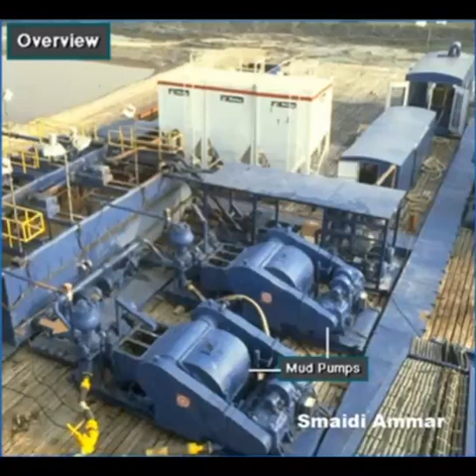Pick up mud from the suction tank and circulate the mud downhole, out the bit, and back to the surface.

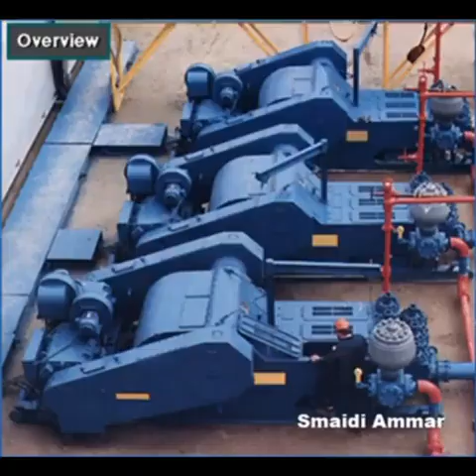Although rigs usually have 2 mud pumps, and sometimes 3 or 4, normally they use only one at a time. The others are mainly used as backup in case one fails. Sometimes, however, the rig crew may compound the pumps, that is, use 2, 3, or 4 pumps at the same time to move large volumes of mud when required.

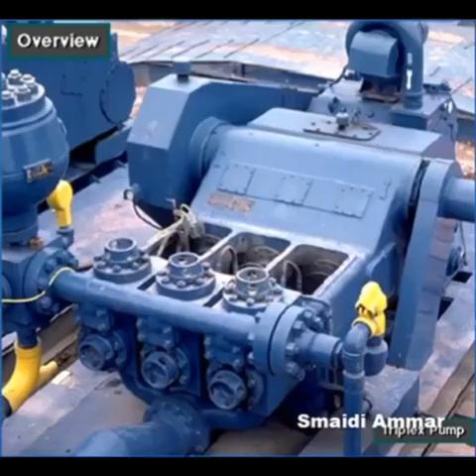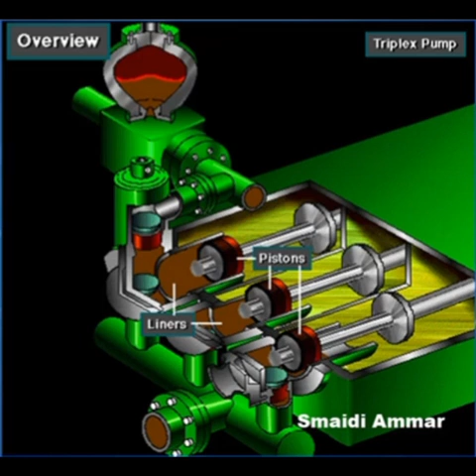Rigs use one of 2 types of mud pumps: triplex pumps or duplex pumps. Triplex pumps have 3 pistons that move back and forth in liners. Duplex pumps have 2 pistons that move back and forth in liners.

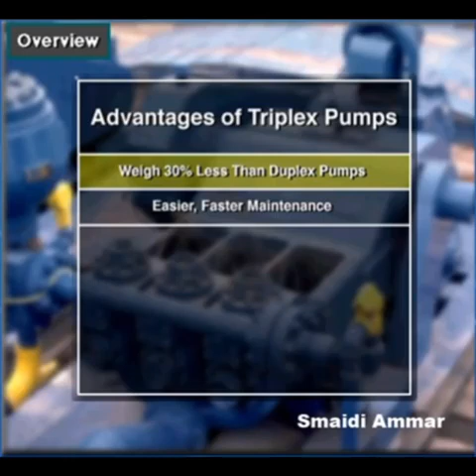Triplexes have many advantages. They weigh 30% less than a duplex of equal horsepower, or kilowatts. The lighter weight parts are easier to handle, and therefore easier to maintain. The other advantages include: they cost less to operate, their fluid end is more accessible, and they discharge mud more smoothly. That is, a triplex's output doesn't surge as much as a duplex.

One of the most important advantages of triplex over duplex pumps is that they can move large volumes of mud at the higher pressures required for modern deep hole drilling. Triplex pumps are gradually phasing out duplex units.

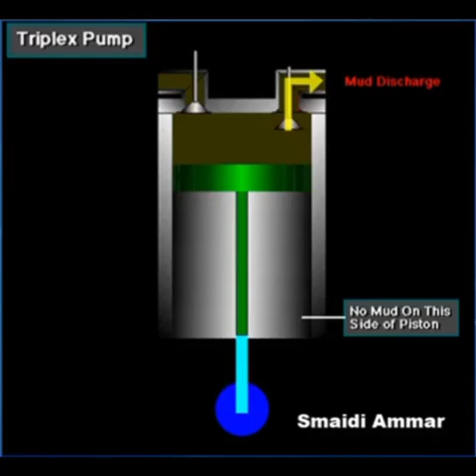In a triplex pump, the pistons discharge mud only when they move forward in the liner. Then, when they move back, they draw in mud on the same side of the piston. Because of this, they are also called single-acting.

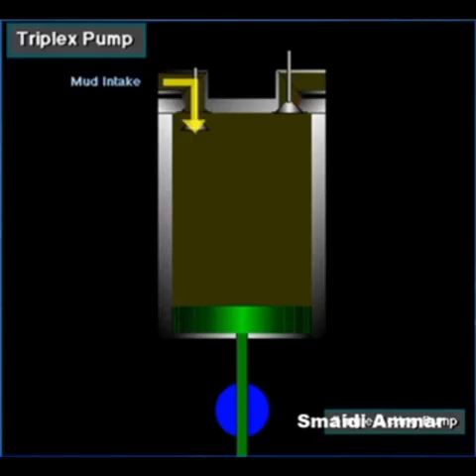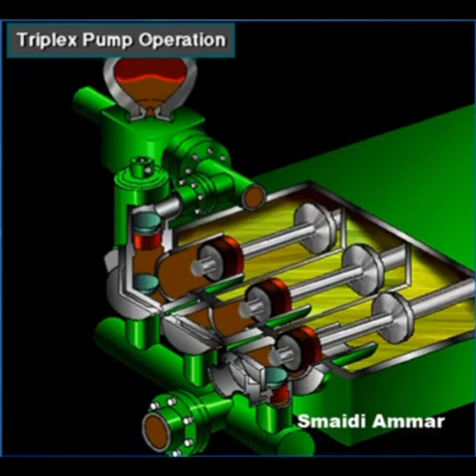Here's a schematic of a triplex pump. It has 3 pistons, each moving in its own liner. It also has 3 intake valves and 3 discharge valves, and a pulsation dampener in the discharge line.

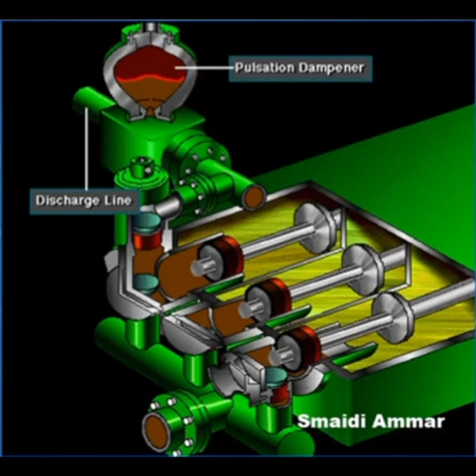Look at the piston at left. It has just completed pushing mud out of the liner and through the open discharge valve. The piston is at its maximum point of forward travel. The other 2 pistons are at other positions in their travel, also pumping mud. But right now, concentrate on the left one to understand how the pump works.

The left piston has completed its backstroke, drawing in mud through the open intake valve. As the piston moved back, it lifted the intake valve off its seat and drew mud in. A strong spring holds the discharge valve closed.

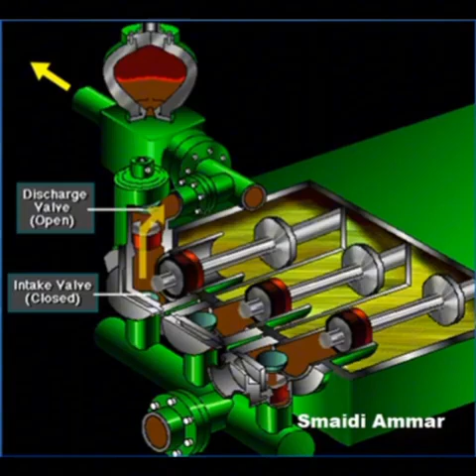The left piston has moved forward, pushing mud out through the now open discharge valve. A strong spring holds the intake valve closed. The left piston has completed its forward stroke, the full length of the liner, completely discharging the mud from it.

All three pistons work together to keep a continuous flow of mud coming into and out of the pump.

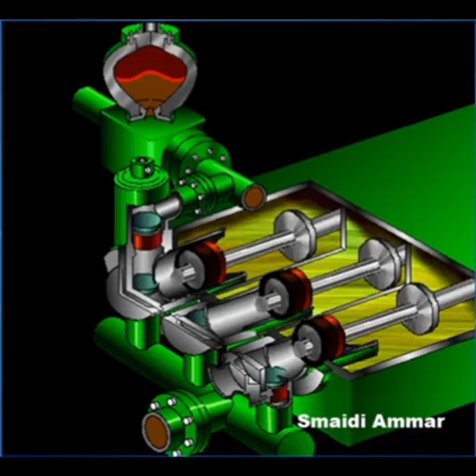Crew members can change the liners and pistons. Not only can they replace worn-out ones, but they can also install different sizes. Generally, they use large liners and pistons when the pump needs to move large volumes of mud at relatively low pressure. They use small liners and pistons when the pump needs to move smaller volumes of mud at relatively high pressure.

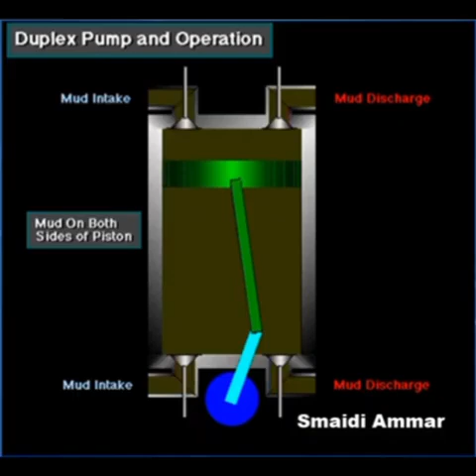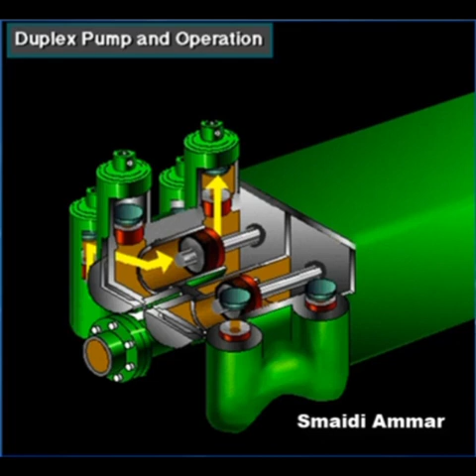In a duplex pump, the pistons discharge mud on one side of the piston and, at the same time, take in mud on the other side. Notice the top piston and liner. As the piston moves forward, it discharges mud on one side as it draws in mud on the other. Then, as it moves back, it discharges mud on the opposite side and draws in mud on the side where it had earlier discharged it.

Duplex pumps are therefore double-acting.

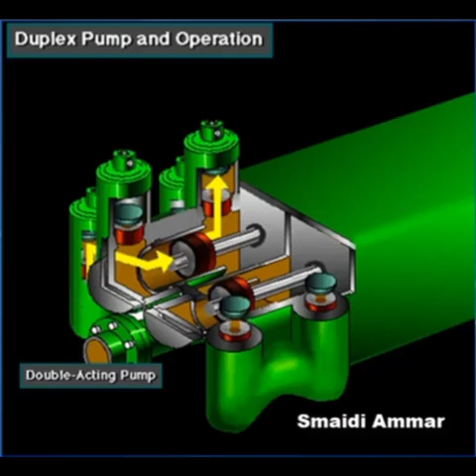Double-acting pumps move more mud on a single stroke than a triplex. However, because they are double-acting, they have a seal around the piston rod. The seal keeps them from moving as fast as a triplex.

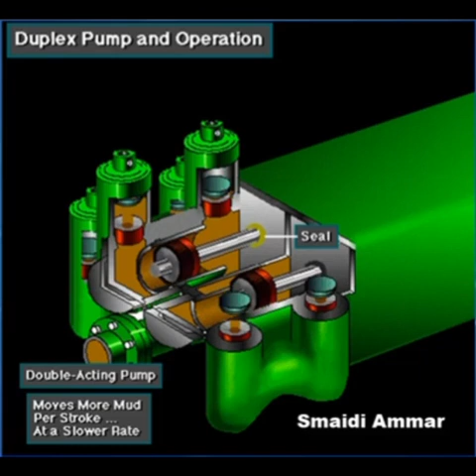Input horsepower ranges from 190 to 1,790, or from 142 to 1,335 kilowatts. The largest pump's maximum rated working pressure is about 5,000 psi, almost 35,000 kilopascals, with 6-inch, 152 millimeter liners.

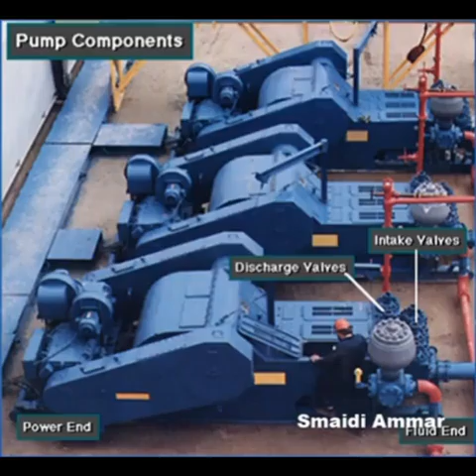A mud pump has a fluid end, power end, and intake and discharge valves. The fluid end of the pump contains the pistons with liners, which take in and discharge the fluid, or mud. The pump pistons draw in mud through the intake valves and push mud out through the discharge valves.

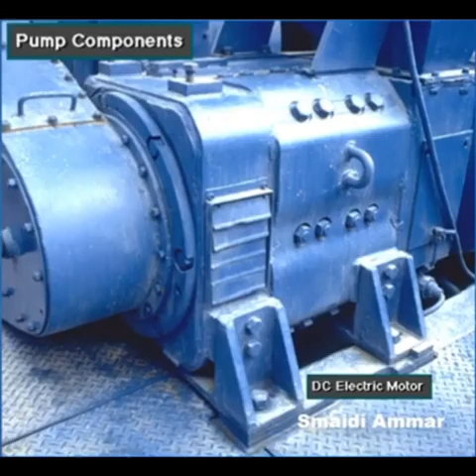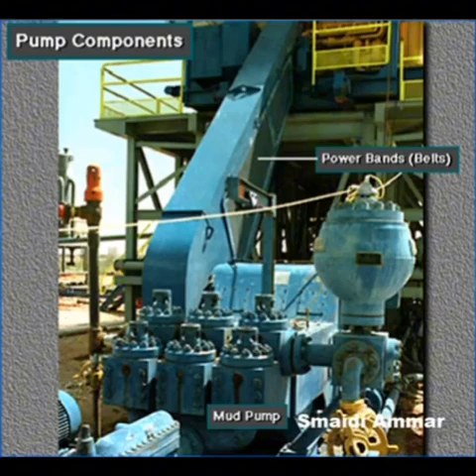The power end houses the large crankshaft and gear assembly that moves the piston assemblies in the fluid end. Pumps are powered by a pump motor. Large modern diesel-electric rigs use powerful electric motors to drive the pump. Mechanical rigs use chain drives or power bands, belts, from the rig's engines and compound to drive the pump.

A pulsation dampener connected to the mud discharge line smooths out surges created by the pistons as they discharge mud. This is a standard bladder-type dampener.

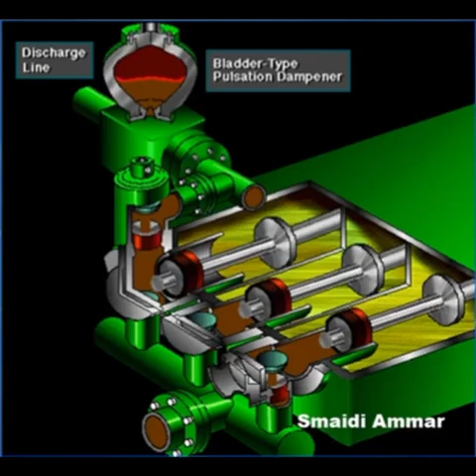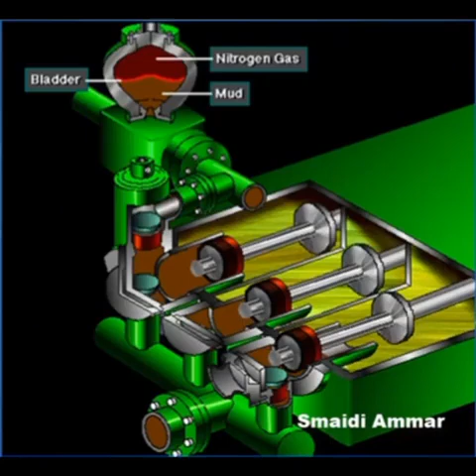The bladder in the dampener body separates pressurized nitrogen gas above from mud below. The bladder is made from synthetic rubber and is flexible. When mud discharge pressure presses against the bottom of the bladder, nitrogen pressure above the bladder resists it. This resistance smooths out the surges of mud leaving the pump.

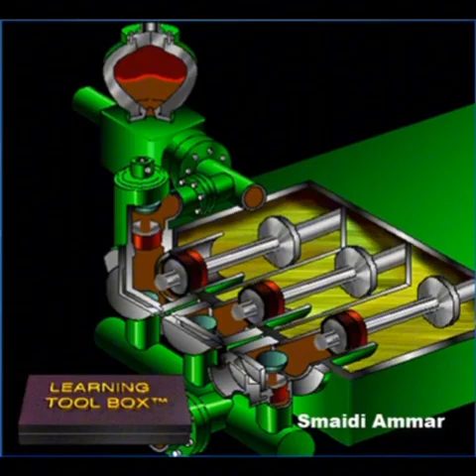Here is the latest type of pulsation dampener. It does not have a bladder. It is a sphere about 4 feet, or 1.2 meters, in diameter. It is built into the mud pump's discharge line. The large chamber is full of mud. It has no moving parts, so it does not need maintenance. The mud in the large volume sphere absorbs the surges of mud leaving the pump.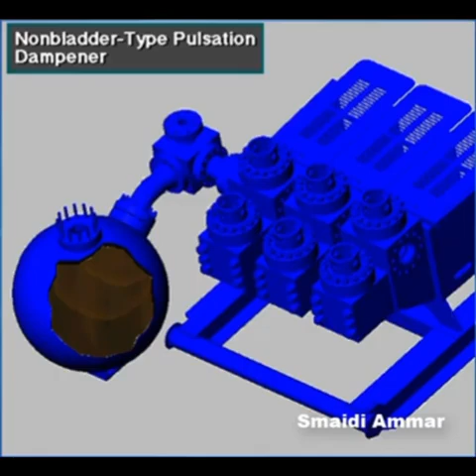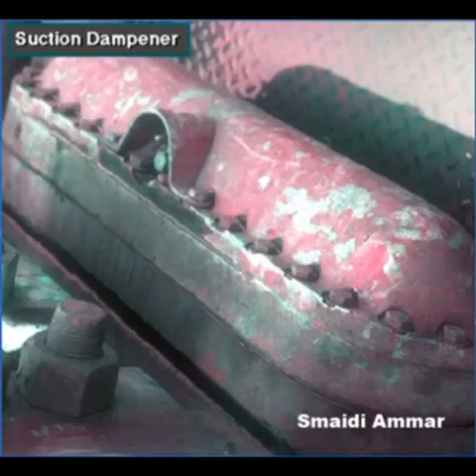A suction dampener smooths out the flow of mud coming into the pump. Crew members mount it on the triplex mud pump suction line. Inside the steel chamber is an air-charged rubber bladder, or diaphragm. The crew charges the bladder about 10 to 15 psi, 50 to 100 kPa.

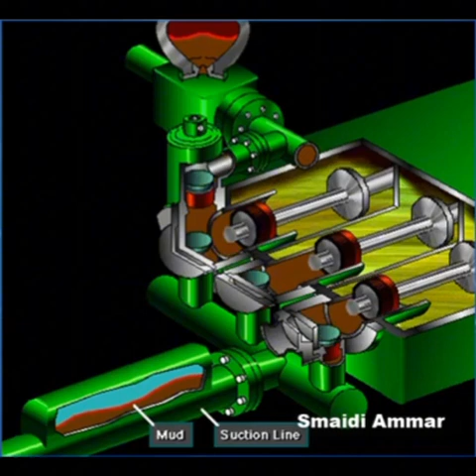The suction dampener absorbs surges in the mud pump suction line caused by the fast-moving pump pistons. The pistons constantly start and stop the mud's flow through the pump. At the other end of the suction line, a charging pump sends a smooth flow of mud to the pump's intake. When the smooth flow meets the surging flow, the impact is absorbed by the dampener.

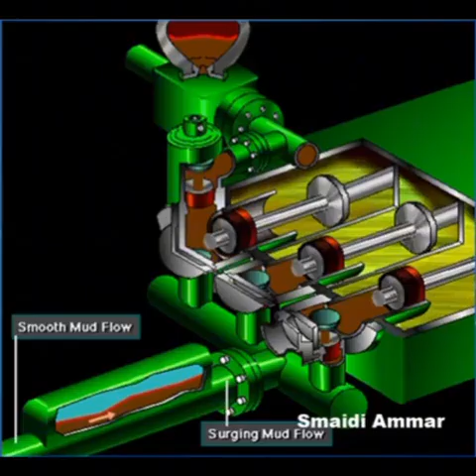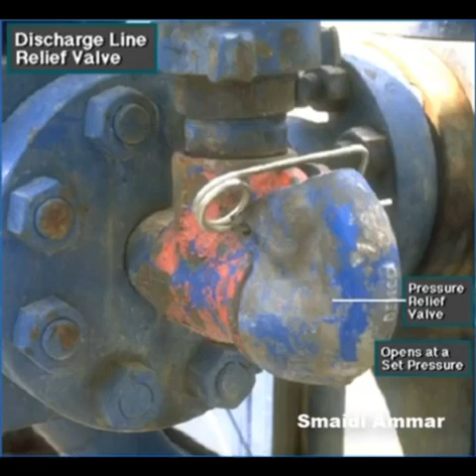Workers always install a discharge pressure relief valve. They install it on the pump's discharge side, in or near the discharge line. If for some reason too much pressure builds up in the discharge line, perhaps the drill bit or annulus gets plugged, the relief valve opens. The open valve protects the mud pump and system against damage from overpressure.

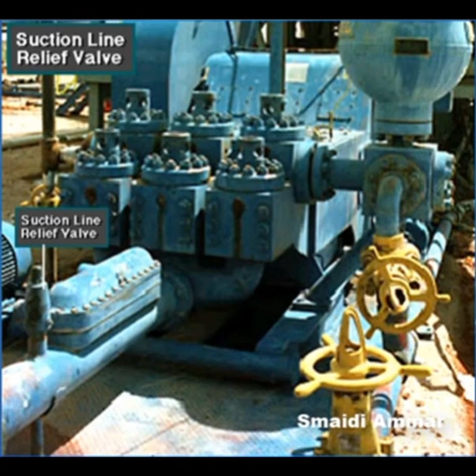Some rig owners install a suction line relief valve. They install it on top of the suction line, near the suction dampener. They mount it on top so that it won't clog up with mud when the system is shut down. A suction relief valve protects the charging pump and the suction line dampener. A suction relief valve usually has a 2-inch or 50 mm seat opening. The installer normally adjusts it to a 70 psi or 500 kPa relieving pressure.

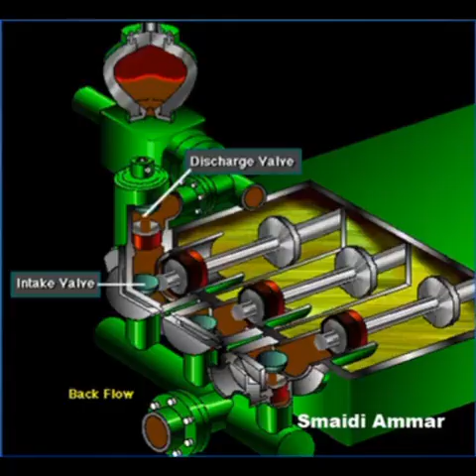If both the suction and discharge valves failed on the same side of the pump, a high backflow or pressure surge would occur. The high backflow could damage the charging pump or the suction line dampener. The discharge line is a high-pressure line through which the pump moves mud. From the discharge line, the mud goes through the standpipe and rotary hose to the drill string equipment.